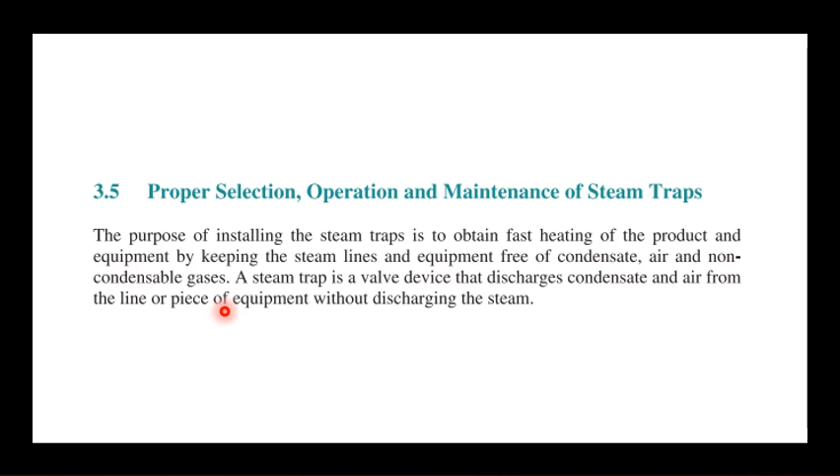So basically the function of a steam trap is to discharge the condensate and air from the line or piece of equipment without discharging the steam. So steam should not be discharged; you only need to discharge the condensate or any air or non-condensable gases, friends, which are mixed up in the steam. So this is the major function of a steam trap, and that's why it is useful for any industry wherever steam is utilized in any process or in any equipment, friends.

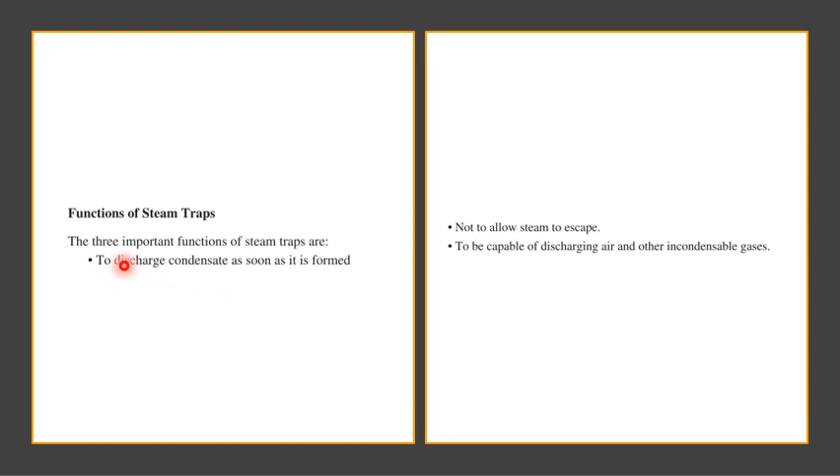So in the exam, if they ask you to define or state the different functions of steam traps, these are three functions of steam traps, and you must also be able to explain them. First of all, to discharge condensate as soon as it is formed. So any condensate present in the steam line has to be discharged, and for that reason steam traps are used, not to allow steam to escape.

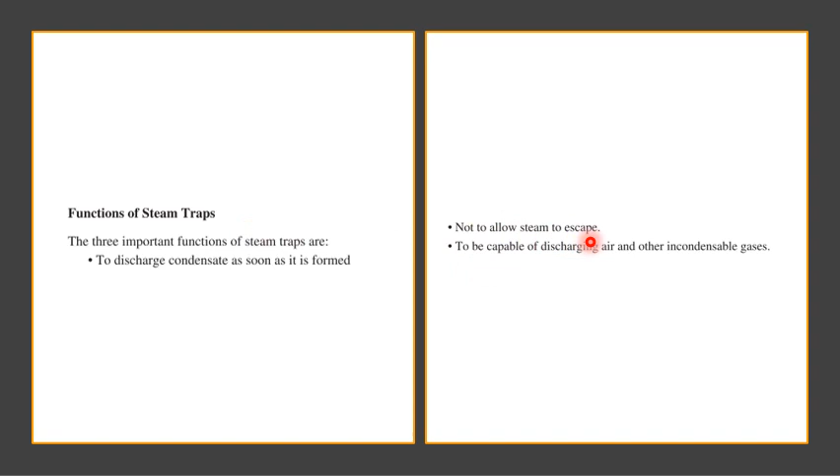So you have to consider two things here. One thing is any condensate that is there has to be discharged, but it should be kept in mind that if any steam is discharged, it will lead to a lot of losses. So steam is not to be discharged, only the condensate has to be discharged, and to be capable of discharging air and other incondensable gases.

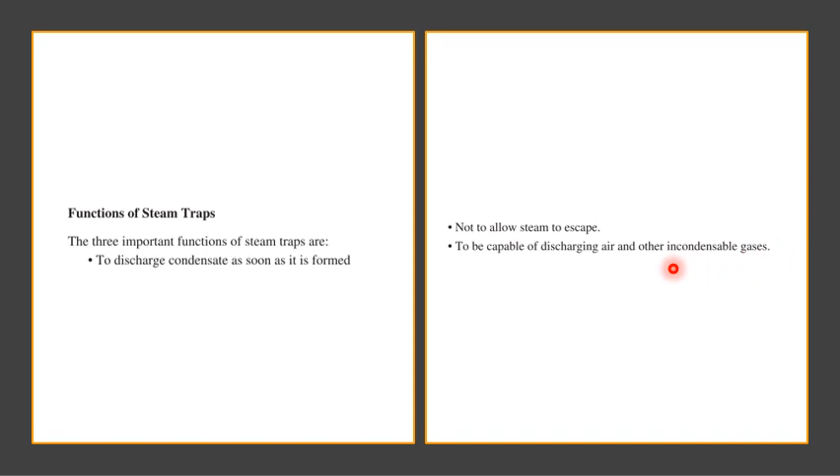So three important functions of steam traps. First, only condensate has to be discharged. Second, not to allow the steam to discharge or escape. And third, capable of discharging air and other incondensable gases. Suppose not only condensate, but also air and incondensable gases are mixed up with the steam; that also has to be discharged with the help of steam traps. So this is the major function of steam traps. If they ask you in the exam, you should be able to write it down, friends.

So there are three types of steam traps, basically thermostatic, mechanical, and thermodynamic. The thermostatic steam trap is operated by changes in fluid temperature. Mechanical is operated by use of fluid density, and thermodynamic is operated by use of fluid dynamics. In the exam, they have a number of times asked to briefly explain steam traps or their functions, and to state the different types. They may also ask you to differentiate between the thermostatic, mechanical, and thermodynamic steam trap, friends.

So you should understand the operating principle of the steam trap: changing fluid temperature, fluid density, and fluid dynamics. These three concepts are important for your understanding, and you should be able to explain them briefly in the exam, friends. I'm not going to explain in detail because everything is already written. You can read it and understand yourself; it's very easy. Only keep the concept of the steam trap in mind while reading, then you'll understand what's going on in the steam traps.

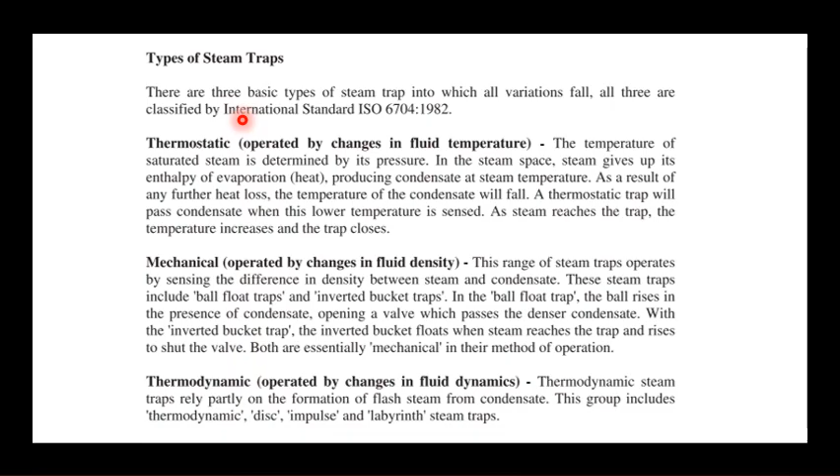So in the case of inverted bucket type steam traps, the concept is the same. You have to remove the condensate and not the steam. You have to block the steam from passing out, but release the condensate from the steam trap. The inverted bucket steam trap is shown in figure 3.9. As its name implies, the mechanism consists of an inverted bucket which is attached by a lever to a valve. An essential part of the trap is a small air vent hole in the top of the bucket.

The bucket hangs down, pulling the valve off its seat. Condensate flows under the bottom of the bucket, filling the body and flowing away to the outlet. So in the first case, condensate fills up and can easily be removed through the orifice, but not the steam. In the second case, the steam causes the bucket to become buoyant; it then rises and shuts the outlet, so it will not let the steam escape.

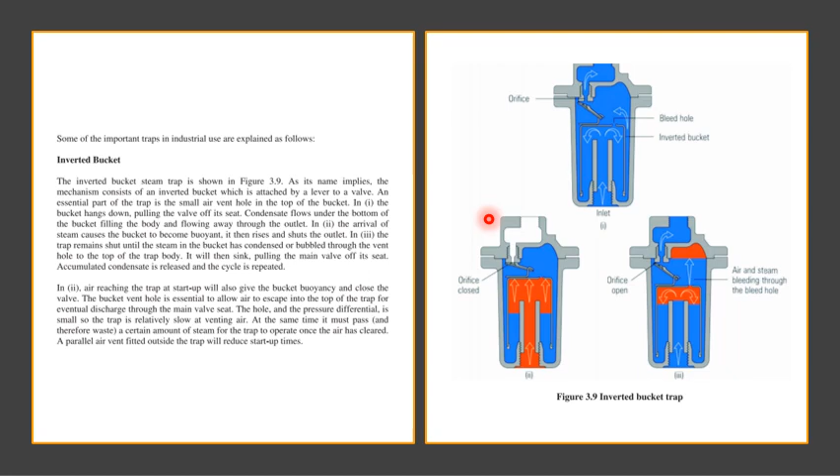So you can see in the inverted bucket type steam trap, when the condensate enters the trap, it gets released through the orifice. But when the steam enters the steam trap, it is trapped here and not allowed to release through the orifice. This is the major concept used in the inverted bucket type steam trap, friends.

Now the inverted bucket type of steam trap has some disadvantages. So they may ask in the exam to list out the disadvantages of the inverted bucket steam trap. The first disadvantage is the small size of the hole in the top of the bucket means that this type of trap can only discharge air very slowly.

So you need to understand the condensate has to be discharged, and also the air which is mixed in the steam has to be discharged. But in this case, the size of the hole is so small that only air is discharged, but it is discharged very slowly, and the hole cannot be enlarged as steam would pass through too quickly during normal operation.

So basically what's happening here, the hole is small and therefore air is passing through it, but it is passing slowly, and you will not be able to increase the size of the hole, because if you increase the size of the hole, steam may also pass through it. So you need to wait for the entire air to be passed slowly. This is the main disadvantage of the inverted bucket steam trap.

Secondly, there should always be enough water in the trap body to act as a seal around the lip of the bucket. If the trap loses this water seal, steam can be wasted. So basically, to trap it, water is utilized here, and at any time there should be enough water in the trap body.

If there is no water or loss of water, steam may release from it, and this will be a real loss for the system, friends. So you have to keep some water in the trap body. So these are two disadvantages of the inverted bucket steam trap, friends.

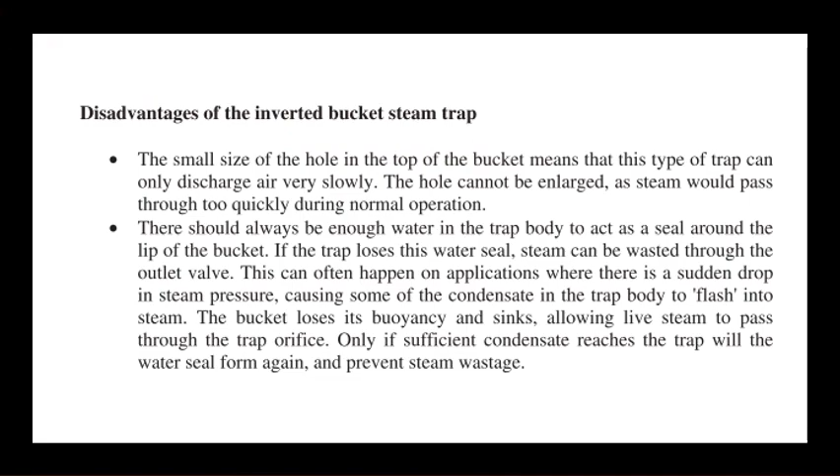So in the case of the float and thermostatic steam trap, what's happening here? The ball float type trap operates by sensing the difference in density between the steam and condensate. The major concept here is the density between the steam and condensate, which is utilized in this type of steam trap, friends.

I'm not going to explain in detail here. Again, you can go through the chapter, the entire thing is explained in detail, but I hope you have understood the concept, how the condensate is released and how the steam is trapped inside the float and thermostatic type of steam trap, friends.

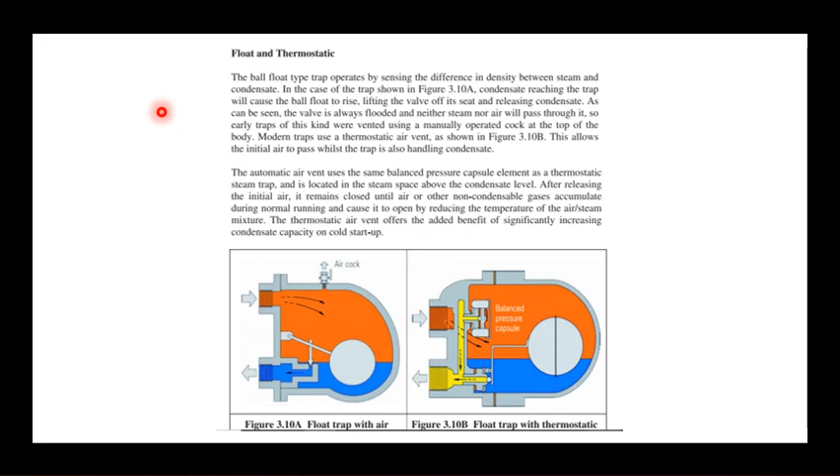So in the exam, friends, they may ask you to give some of the advantages of the float thermostatic steam trap. So these are some advantages listed here which you must remember for the exam, friends. The trap continuously discharges condensate at steam temperature. This makes it the first choice for applications where the rate of heat transfer is high for the area of heating surface available.

It is able to handle heavy or light condensate loads, as long as an automatic air vent is fitted. The trap is able to discharge air freely. It has large capacity for its size. You can see in the other case the air vent size was small, and therefore air was releasing slowly. Here you can release a large amount of air, with a large capacity for its size.

Versions which have a steam lock release valve are the only type of trap entirely suitable for use where steam locking can occur. It is resistant to water hammer. So these are some of the advantages of the float thermostatic steam trap.

I'm not going to explain you again here, just remember these points. So they may ask you in the exam only to list the different advantages. They may not ask you to explain it in detail, but you must remember some of the points here. So 1, 2, 3, 4, 5, 6 points are given here. Either you can remember all the 6, or just 5 of them, friends, for the exam point of view.

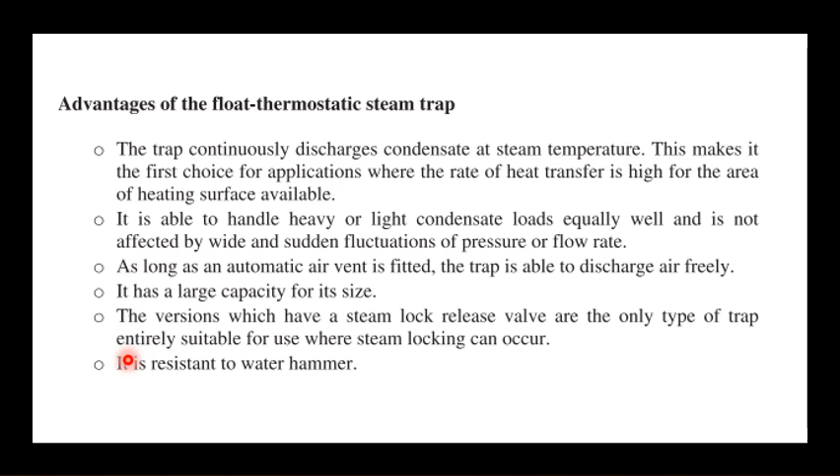So in the case of bimetallic type of steam trap, here basically the function is same. You have to release the condensate, but you have to trap the steam. But the working principle is different here. In this case, the temperature sensing is required. Basically, what happens here, when the condensate or any air or gases enters, it has a bit lower temperature than

the steam. So this bimetallic strip will not expand when the condensate or any air or gases enter inside the trap. So in this case, it remains at the same position. It will not expand, and therefore condensate or any gases will be able to release out. But as soon as the steam enters inside the trap, this bimetallic strip gets expanded, and therefore the valve, if it is open here, will be closed. In that case, the steam will be trapped here.

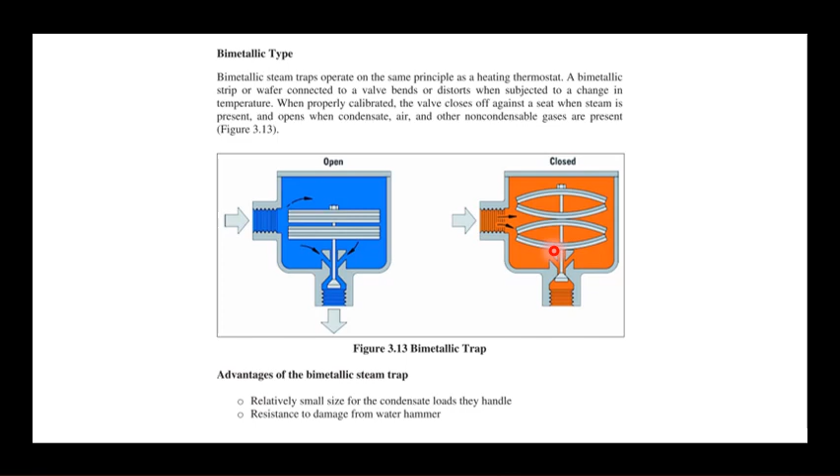So this is the major concept you must understand in the case of bimetallic strip trap, where the bimetallic strip is used to trap the steam and release the condensate, sensing the temperature, friends, of the condensate as well as the steam. Temperature of the condensate or gas is lower than the steam, and this is the major concept that you must understand, how this type of bimetallic strip trap functions, friends.

So with this, I am ending the part D, friends, and hopefully the concept and the explanation that I provided in this particular video is helpful for you for exam preparation, friends. Please be connected with me, because I'm also going to upload the part E, where I'll bring the different areas and concepts from the chapter steam system.